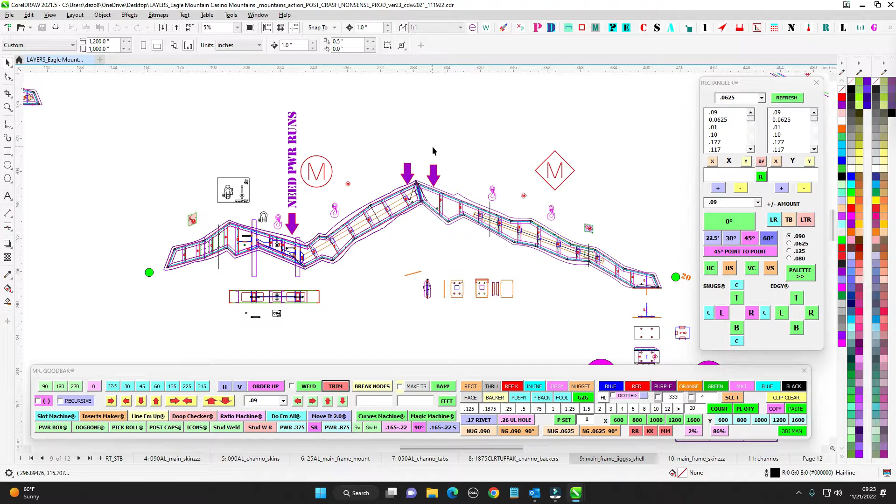So we got a lot to go over here. Pop some popcorn, but it's not that bad. It's just a lot, there's a lot of parts, and we've got some targets we have to hit to make sure this thing installs properly. So we'll just go over all that. Let's get the page turner out here.

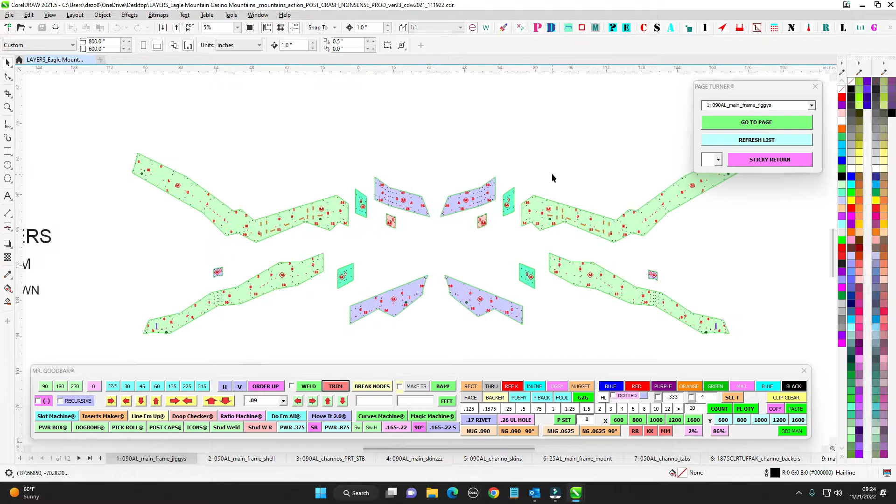All right, so let's start with the lay of the land. You got this space crab thing going on, whatever this is. So just like the eagle, you got some internal jigs, just kind of solid one pieces. And then you have a bunch of internal pieces here. You're going to rivet all this together, just like the eagle.

You got your hard candy shell. And as you remember with the tester, you guys did this kind of channel system. So this is the whole thing right here. Got port and starboard sides. These are going to be your main skins on the main cabinet. And then this is going to be your channel, I'm calling it the channel. Those are the actual channel letter parts that the LEDs are going in, I'm calling those the channels.

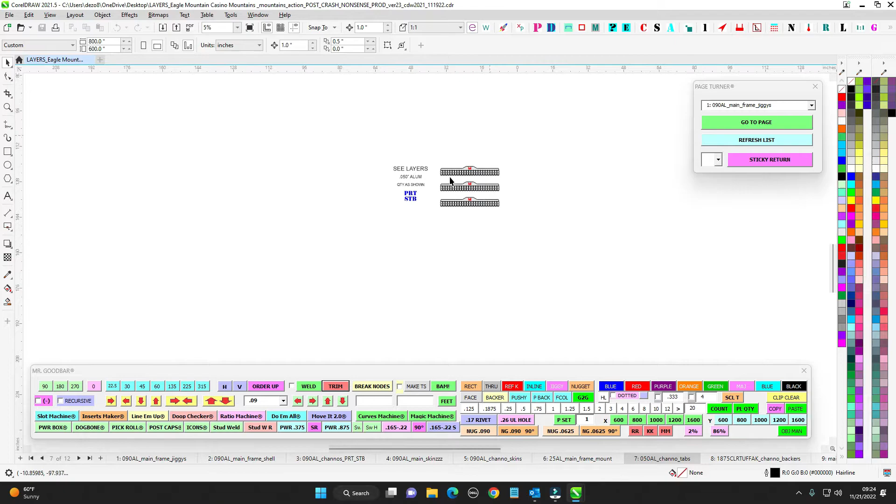And then we've got the quarter inch kind of internal thing, just like the eagle, lift point, main structure. We've got some tabs, just, since we got it dialed in, thumbs up on the little pre-mounted holes. So that should save us some time. And here's our Tuffak for that, for the

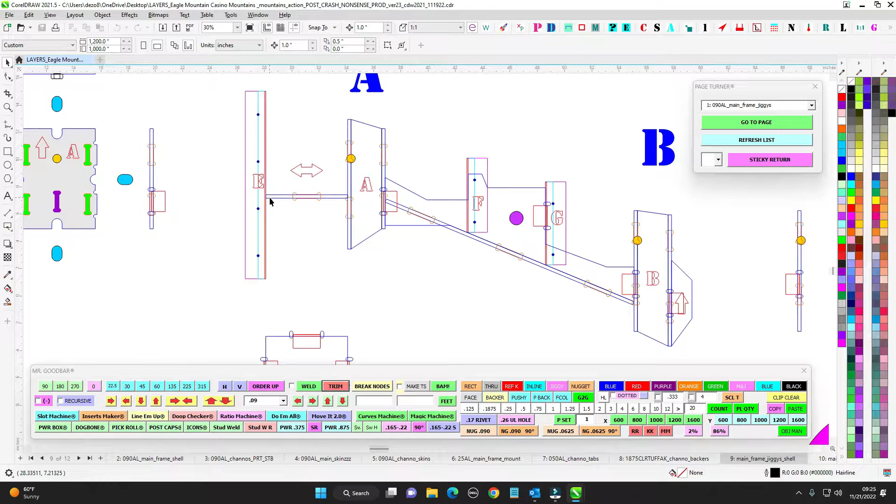LEDs there. All right, so excuse me, just like the eagle, you're going to start with that quarter inch kind of main box. This is it kind of assembled. It attaches up against E, the internal Jiggy 090 there. You'll have a dog bone, and this is kind of at a slant, and then F and G will also kind of dog bone in and slide over this whole structure. But these are going to be your boxes for your tubing right here.

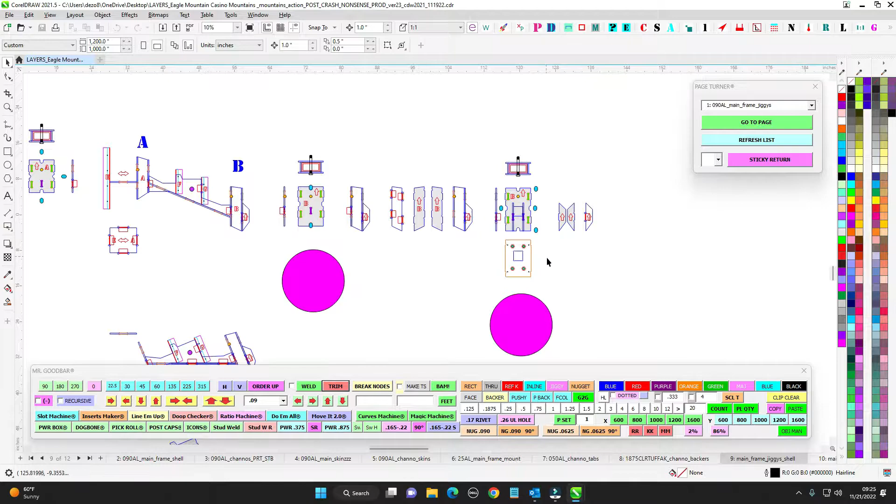Just like the eagle, you got your little internal pieces here. You got little slices here for running power through if we have to, but I'll go over that. Originally we're going to try to thread the power through this thing, but I think I came up with a solution that's going to be a lot better for everybody. So,

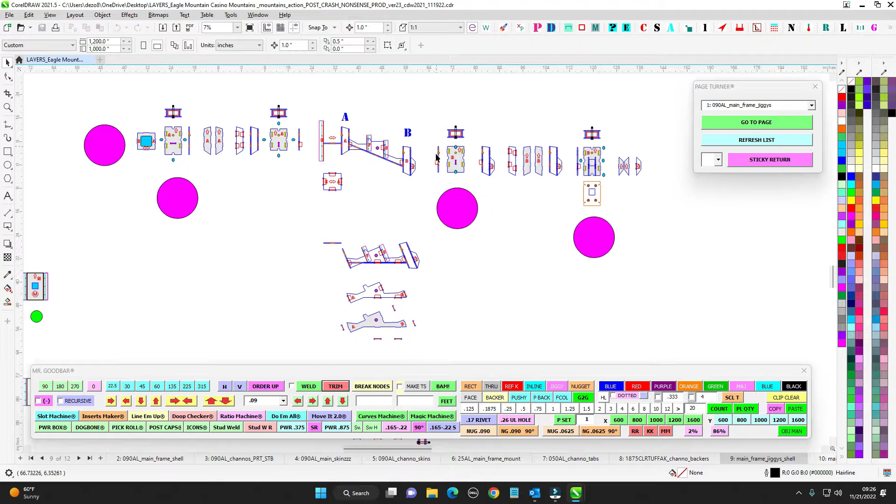So you can see here's F and G right here. Those will slide over. So anyway, get this guy kind of welded up, tacked up, good to go. I believe you can kind of fully weld this because then you're just going to put the jigs together around it. It's a little different than the eagle. I think the eagle's a little more integrated and kind of more of a pain in the butt, but this is just a more simple, get this welded up and then it'll fit in here.

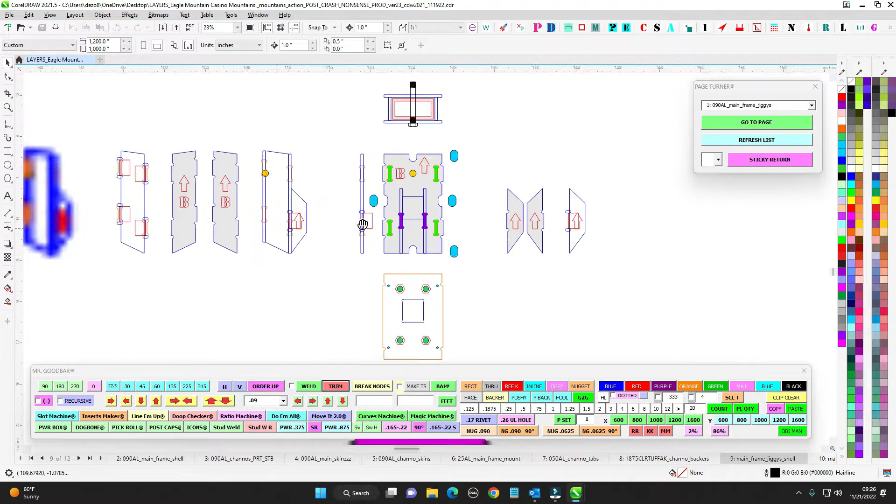Also keep in mind you have these two tabs that will be on the outside and that'll be ready to receive the 2x2 that's going to slide through. So you're going to have a piece of 2x2x8 that's going to slide through this part and it's going to lock in here and then you're going to burn this to this and then these guys here. So that kind of extends out. That's what these two nuggets are here for.

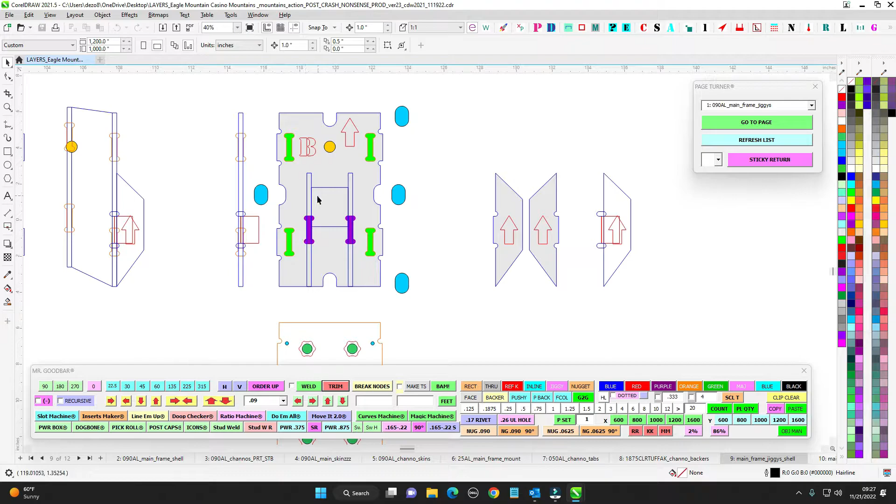So I don't know if you want, make sure you don't weld on the inside, but I don't know how that'll work if you want to just tack it so that way you can kind of bonk them and make sure that this piece, this 2x will slide in there and then you can burn it before you put the skin on. So yeah, you have to wait and see how you jump off that bridge when you get to it.

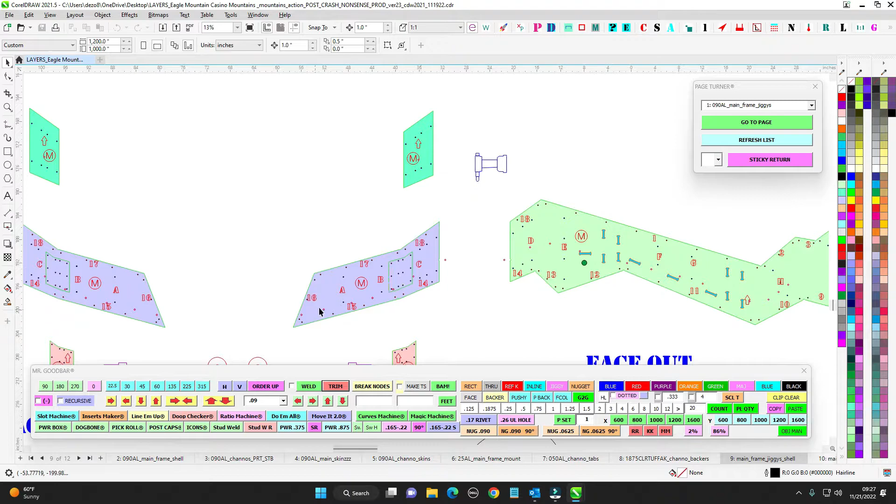Anyway, so get this welded up and then just like the eagle, get all these pieces ready and then you're going to put the quarter inch in here and then you're going to go ahead and just rivet everything together, just like the eagle, make it easy. Unlike the eagle, these splices for these pieces go on the inside. So put those to the inside and you'll go ahead and just rivet that together.

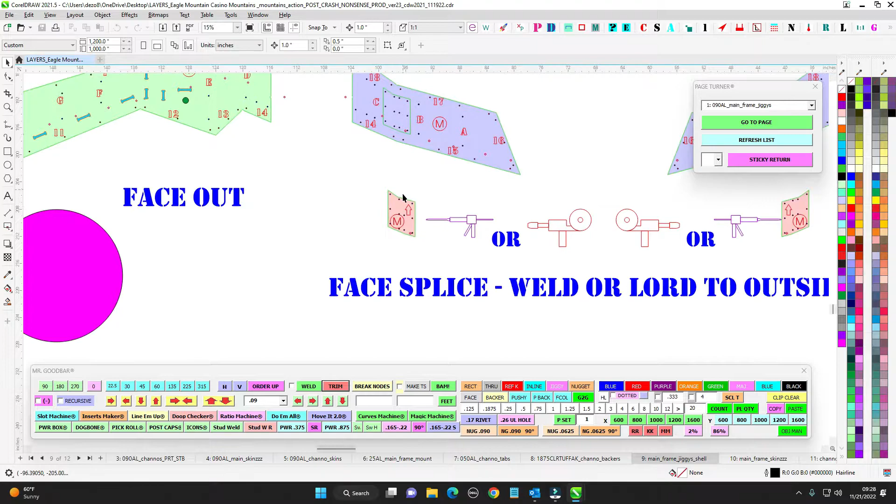And then like the eagle, the main skins are in multiple pieces here. So wherever these splices are going to land, here and here and there, on the Jiggy, you're going to have these little face pieces that go to the outside. So you can either lords those on, or I'd probably tack them on the outside and then clean them up.

And that way, when we go to put the main faces on there, we'll have a little stabilization point there. So, okay, that gets us to like this guy here and all that's ready to go.

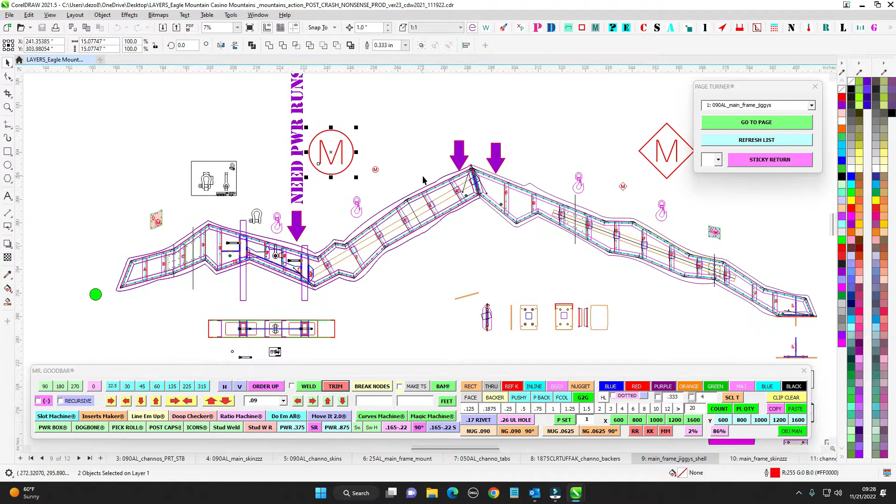Now, when it comes time to put these two sections together, you have some internal 1/4 inch plates. Now again, I apologize for jumping around. So I dedicated this one, the one that has the mounting in it.

We're going to do that as the round M. So everything's going to have a reference kiss mark that's going to be the round M for this side. And then I've got sort of the diamond M for this side, so you'll notice everything's going to have a diamond M on it that's supposed to be here. And you know, this one's going to have the round M.

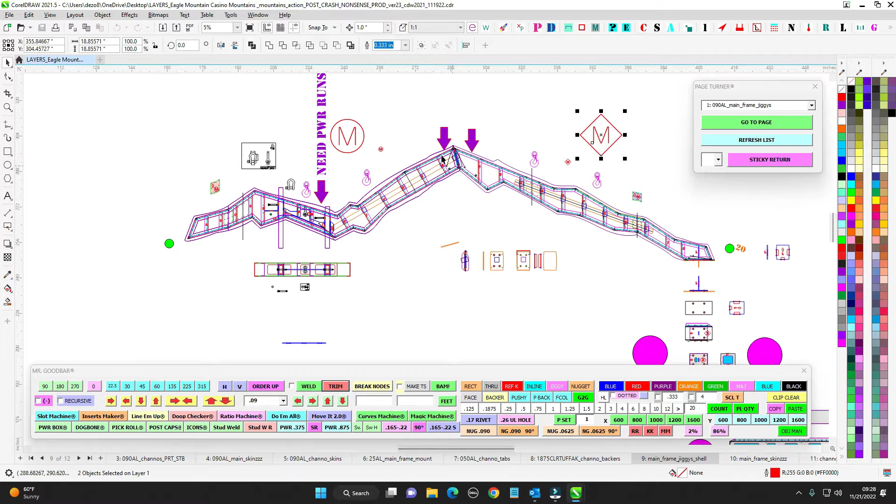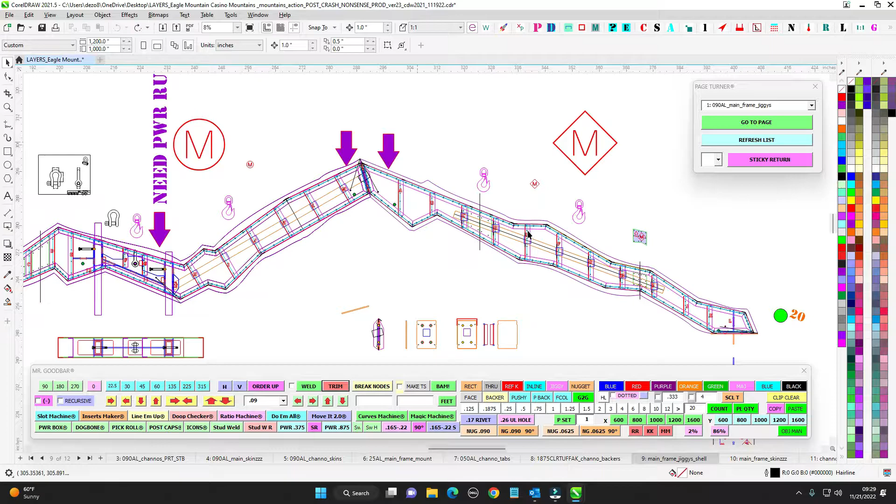So bringing these together, because this is going to be over 10 feet, and then this one's going to be over 10 feet. So of course, taking them up to the location, probably be better to just transport these separately. Whether they lift them or not, I'm not really planning on having them lifted as one, but you're going to have a bolt-together section here. It could be strong enough, but you'd have to really scratch your head on that.

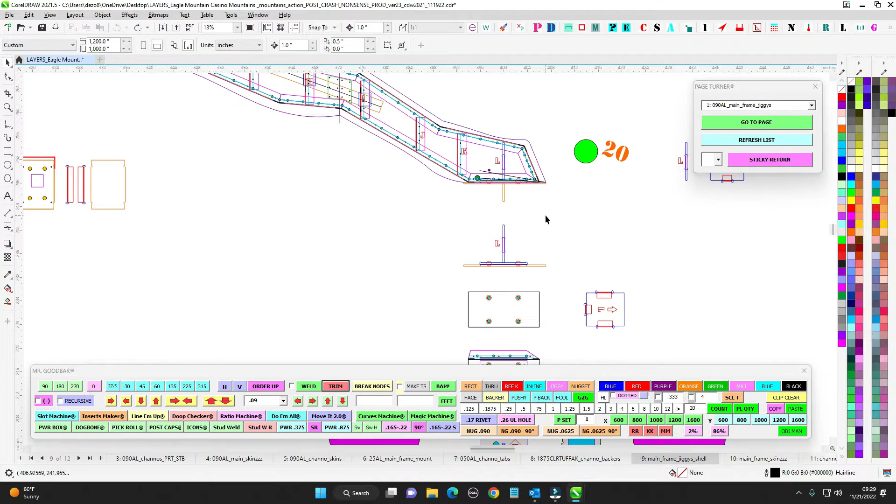But I have it kind of set where you're going to lift this and then attach this. But where these attach, you're going to have a 1/4 inch plate, and here is going to be the most important one because that's going to attach to the main box. So we don't want to miss these plates.

You'll notice that these plates here have your number 8 with your diamond M. This has 1/2 inch nuts. Go ahead and weld those up like we do, and that's going to go inside here. You see it has a notch.

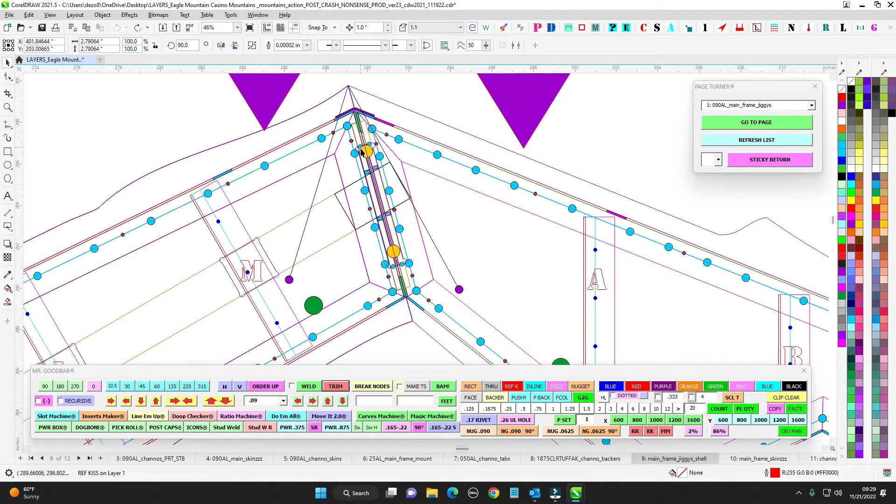And then most importantly up here, we have 2 of these plates that are going to go back to back. Now the round one here is the one that has the round M. That has our nuts here. And then on this side, there are no nuts. This is going to be 1/2 inch through, and that's on this side here.

So you can see where I have this nugget and I have this nugget. This is going to be access in. So for install, they'll have direct shot with like ratchets or whatever to get to these bolts, but that's how this is going to go on there.

So essentially this thing's going to slide down on the pipes. Hopefully the holes are there. They're going to bolt this in, maybe keep it a little loose, and then you pick and bring this piece up and set it down, and it's going to go ahead and grab what little bit of the 2x2 that sticks out. You have this little nub of 2x2.

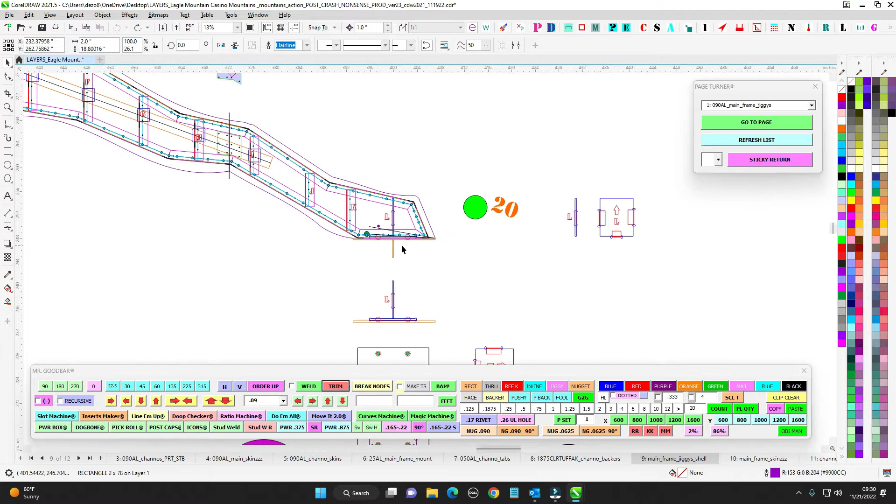The other one is just going to rest on that, and then that gives install a chance to come in, bolt this together, and then over here will be a bolting system that is yet to be determined, but at least I know where this target is and I can work out from there.

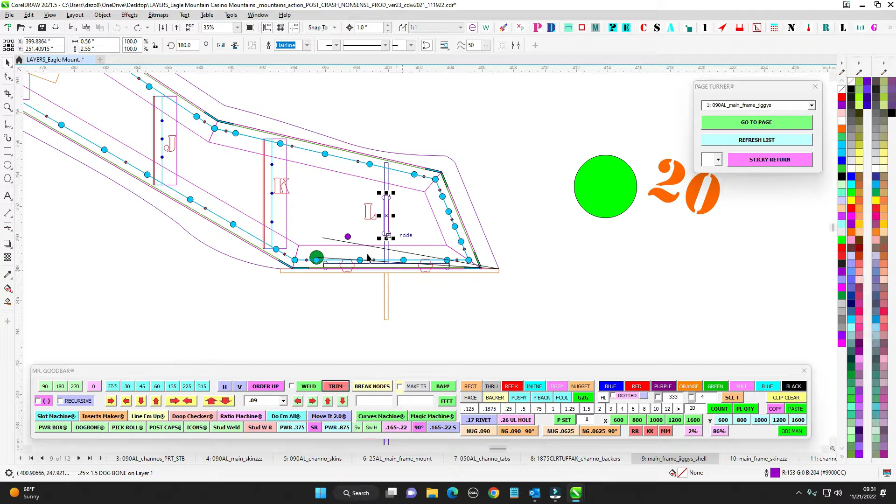So we want to make sure this plate gets in there. And then there's a little top plate here that gives like a vertical brace. So you want to dog bone this in, and then vertically, you can see where that locks in there. So you want to get that all in there nice before you put the shell on, get that burnt in and get that attached, and you can see where the Jiggys are all notched for that.

So you see where the plate goes when you bring in your round M, and then you bring it into the diamond M. You can see where that one is notched, and then where this guy goes down here, this is number 8. You can see where that lays in there, and then you'll have your vertical there.

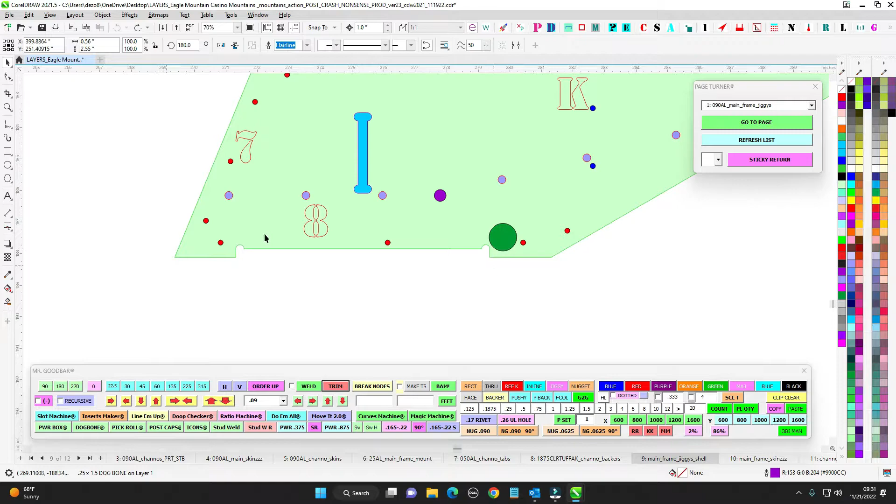So make sure that all gets in there really well. Same thing here, you're going to put this brace, this splice to the back and just rivet it, but then the front has this little guy here. That's a stabilization piece, so I'd probably just tack it like you did the Eagle, and then just go ahead and clean it up.

So anyway, that'll get you to that far where you have the Jiggys all in, everything's riveted. You get these 1/4 inch pieces all bolted in or welded in nice and get ready because that's going to be structural. You've got your cut list, so it's a 30-degree cut to make that little stick up there.

So you got that guy there, and this one here is just going to slide through. It's going to start at vertical C. See, I have everything labeled, so it's easy for you guys. So it starts at vertical C, a couple inches there is fine, and then just make sure you have some sticking out of I, so you can see where that's going to be there for lift.

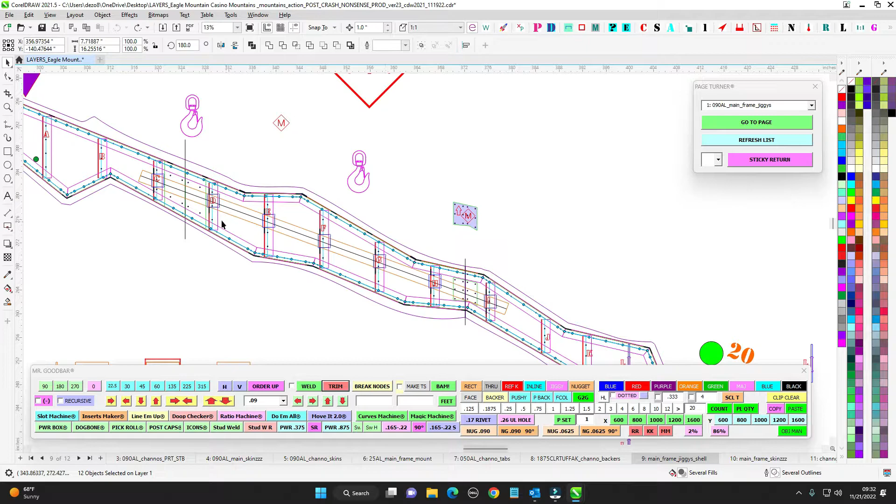I have an opening, you can see where the nuggets are there. This is an opening here, so they can do a cinch, and then you have an opening here, you can do a cinch strap. And you probably have to use uneven straps there.

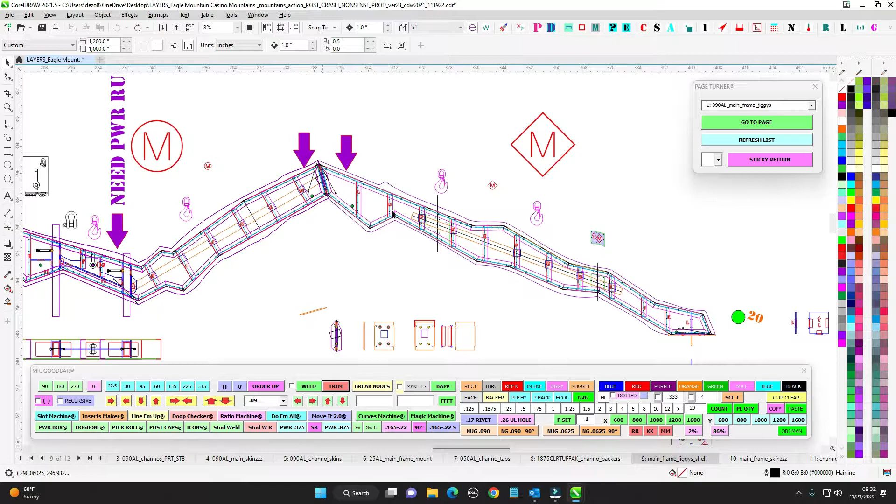But so theoretically, like I said, this will go into place. The holes should be there. They can bolt it, just let it sit, and then bring this in and kind of push it around, and make sure that this goes to that mounting plate, which is yet to be determined, but that's coming up. And then that will allow for install.

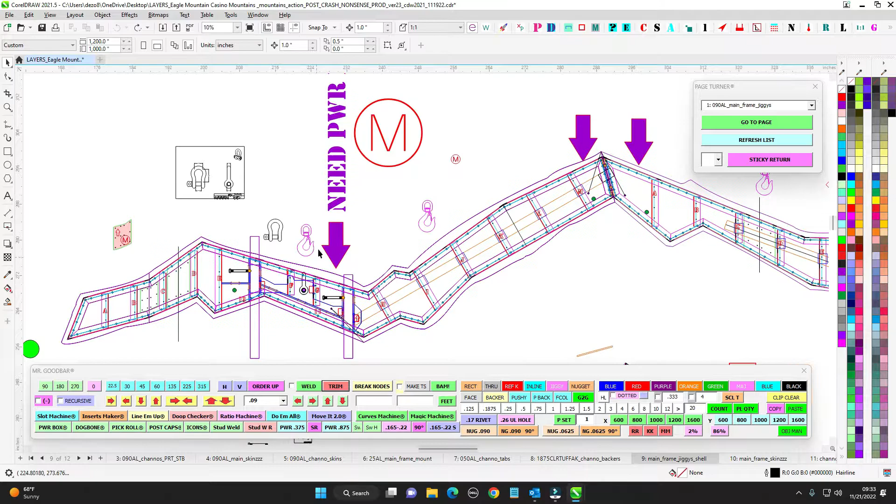Once we get this thing built, though, we can go ahead and bolt it together and see how it behaves. Maybe with a big enough strap, because I have this clevis here, maybe if it goes up high enough, we can get enough to where we can maybe lift the whole thing at once. So we'll have to determine that. But it's going to be heavy and unwieldy, so it's kind of up to install.

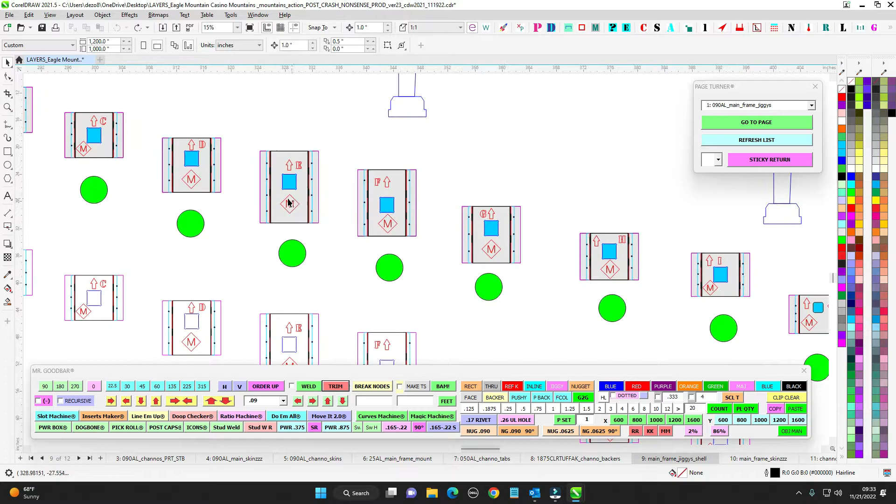So anyway, so you get your jigs, get everything riveted together. Again, just look for the diamonds, and I have everything, letters and everything, corresponding to everything here. All these scribe marks go out so you can see what's going on. Just like the eagle, you're just going to follow everything.

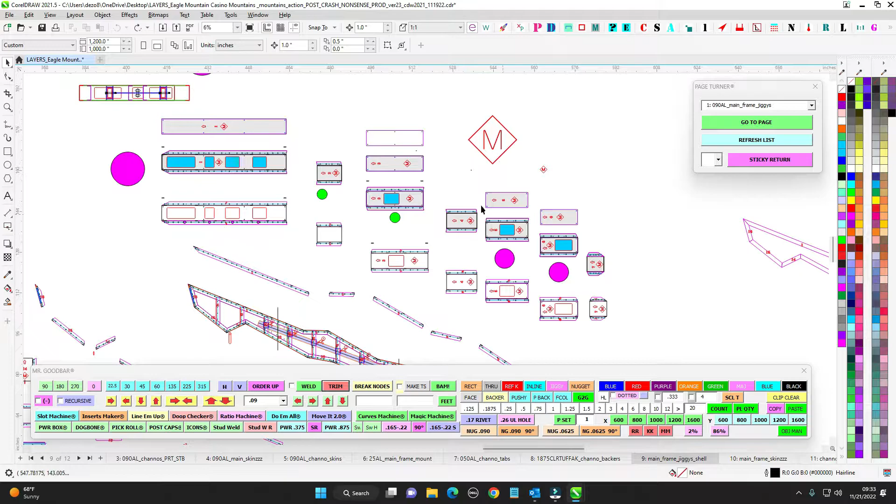And then once you're done with that and everything's good, then it's hard candy shell time. So you go ahead and follow your way around, 1, 2, 3, 4, just like that, all the way around, weld it up just like the eagle, clean it up, and then you should be ready.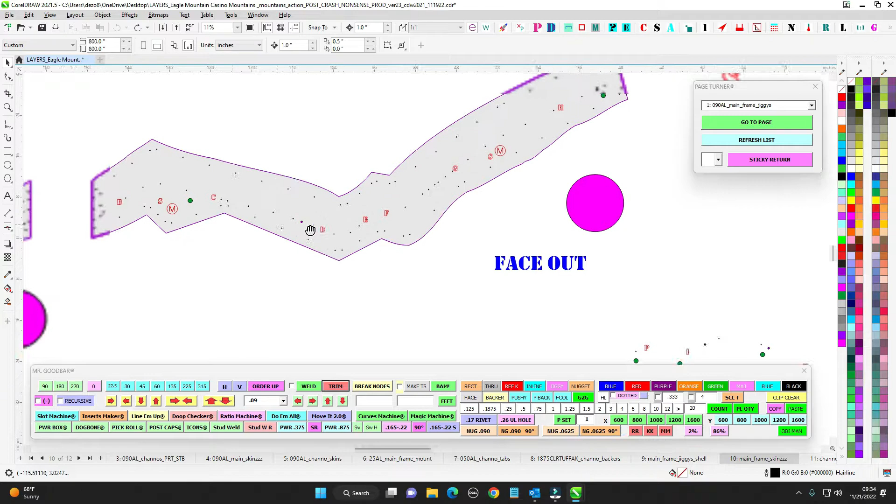So at that time we're ready for skins. So then you're just gonna lords on your main skins here. And I have the face out, so I have scribes out. All this will be hidden, so don't worry about it.

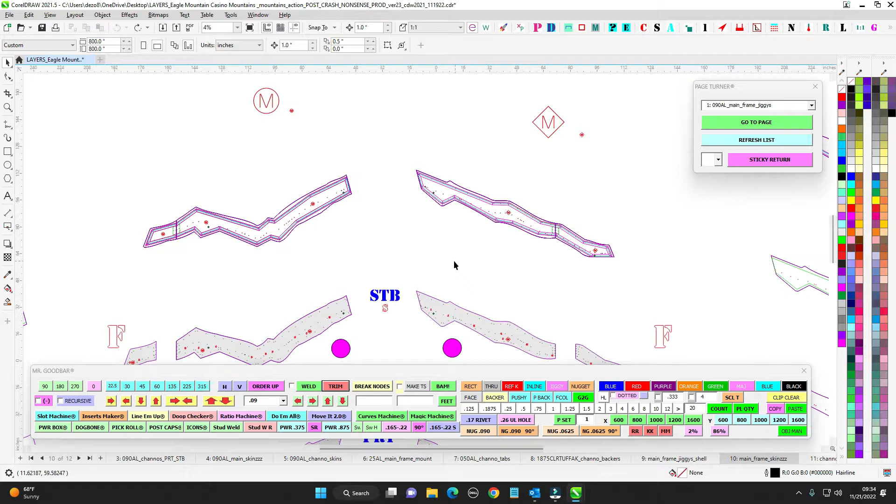But that way you'll be ready for when you do your channel returns. All this will be labeled for you. So you'll have your splice piece on the other one I talked about. So you just lords this on there, get it all nice, lords this one on, and then that way that'll be the main structure basically. And I think that'll be about done as far as that's concerned.

So once you have that all done, then we transition over to doing the channels. This is more of the sample that you did, right? If you remember, we did this part here.

So again, 4.5 or 4 1/4 return, nothing changes there. Actually, you know what, I think I have 4.5. Better change that up for you guys. Yeah, I'm gonna do that right now. Let's see, there you go. Error correction on the fly. So yeah, it's 4 1/4 depth.

Just like you did though, I have it all laid out here. You got 22 strips, 11 per side. So let's just go over, I think that might be the first thing you do because you want to get all the welding over with. I mean, obviously you're going to bend all these pieces up.

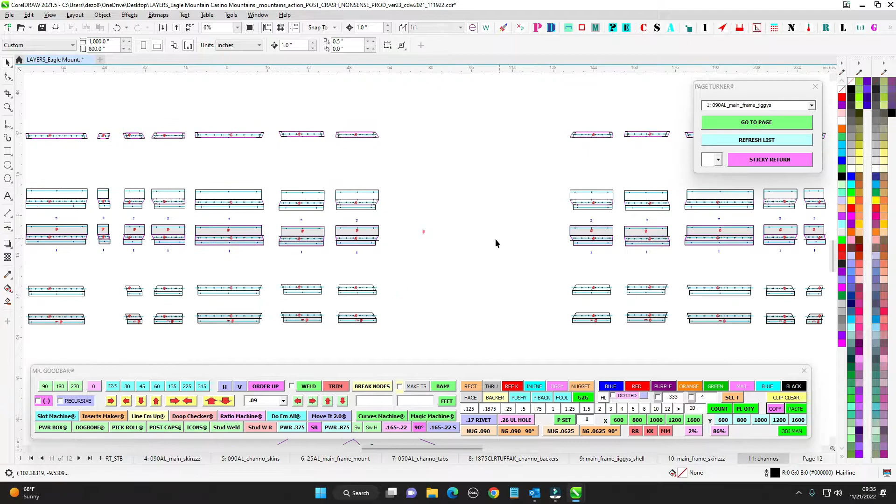Woohoo! Look at that. Somebody's standing at the brake for a while. You're going to have to Rochambeau for that and see who gets paper, rock, scissors there. Short end of the stick there.

So for the 050, it's going to start up here, and it's going to wrap around, and you're going to weld it just like you did reverse channel. You're going to start up here, and then bring it around and just follow the bottom. You did an excellent job on the sample. Looked great, so keep that going.

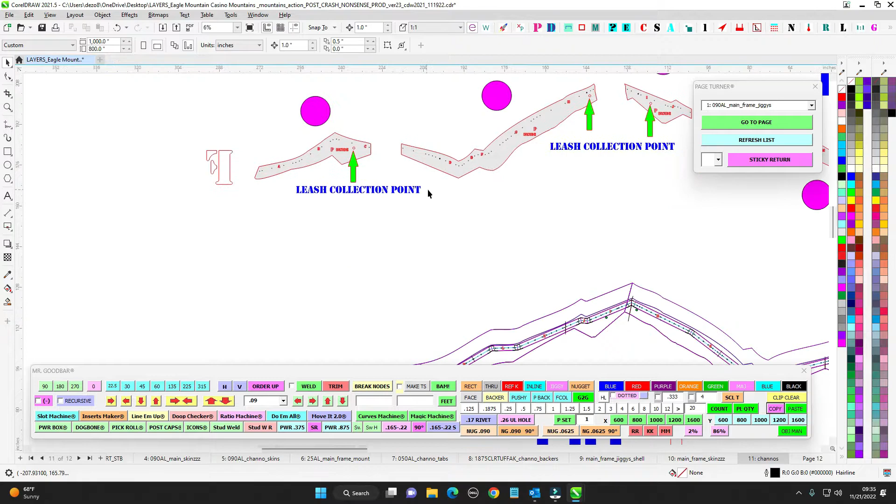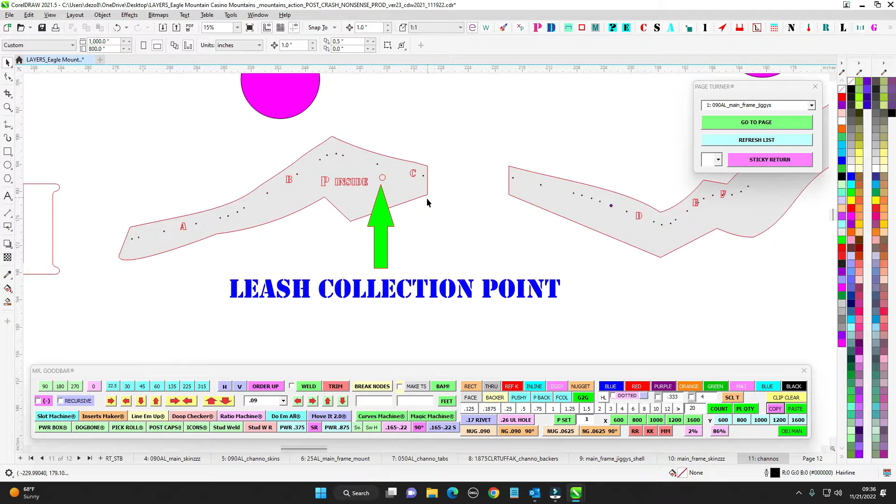So this piece here is going to be the splice for the face. I don't know how you want to do this, but the idea is that this is going to be put on there, so you kind of need to do the return first. But this needs to be spliced, so I don't know if you just want to do it in sections and then somehow stabilize that return with a little piece or something, because you can't really do the return if this is loose.

The idea is that this face is going to be stabilized by this piece, but you can't put that piece on because obviously you can't weld the return when this is in the way. So you might end up doing the returns just in sections.

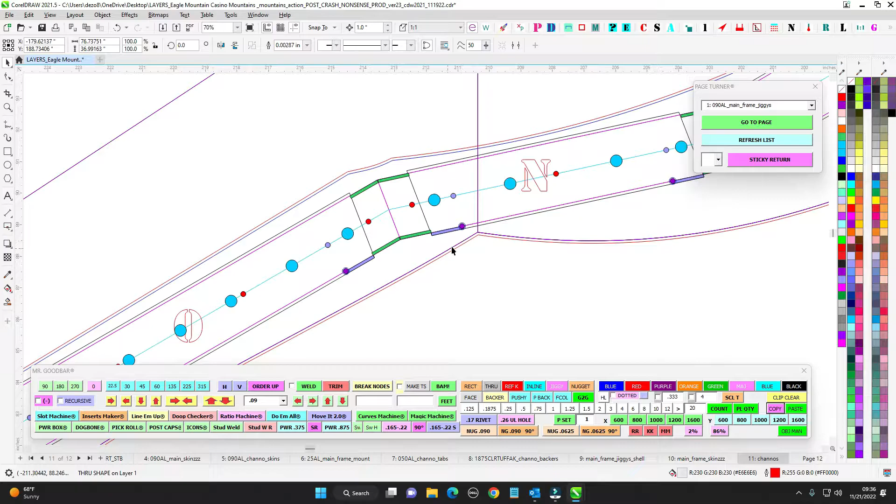And then when it comes time to put this piece on, you're going to weld this piece to it. And then you might have to weld here or something to help stabilize that, or slide a piece of bent metal on the inside with some lords or something to stabilize that return.

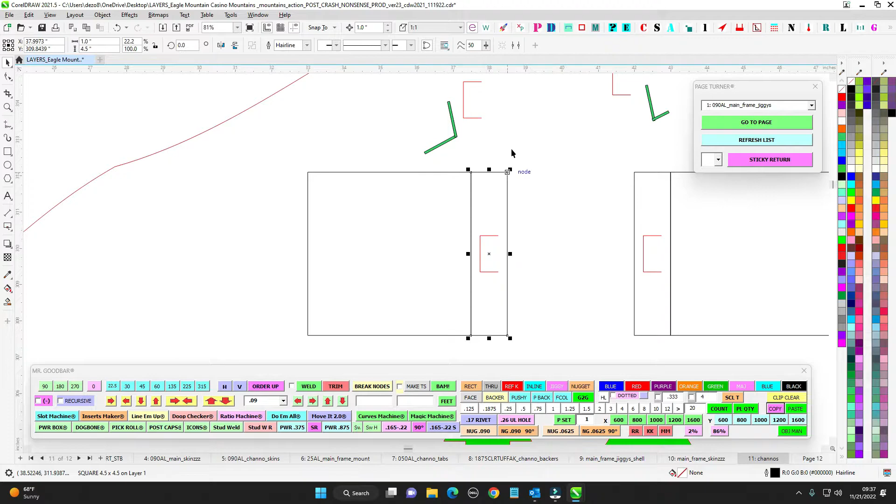But like I said, you're going to go ahead and do the 050 return all the way along the bottom, all the way here. Now when you get up here to the top, I went ahead and made a 1-inch flange, and if anything, we want to go ahead and make this a little bit smaller. We can probably overcook it a little bit, so it can be away from the edge.

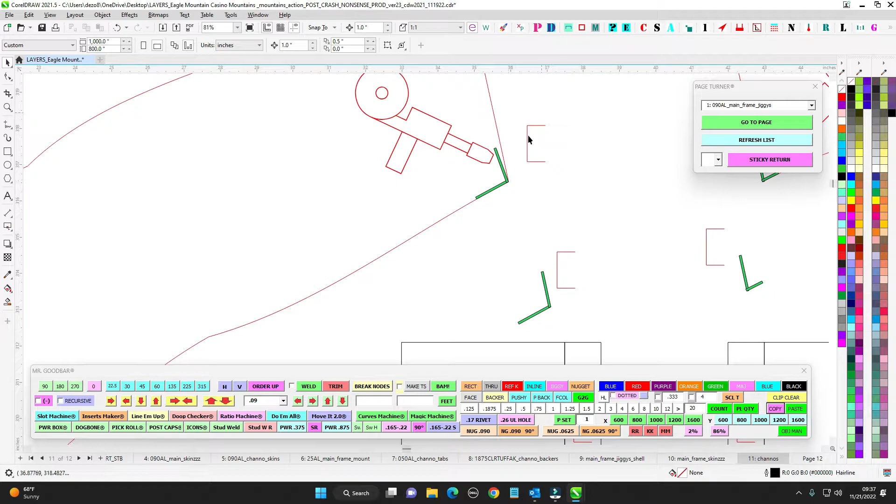So the idea is you're going to bring this up here, but we're going to have a 1/4 inch piece of return just flapping around. So I would go ahead and lay out a 1-inch bend and bend it up, and that way you can weld it to the face, and that corner will be reinforced. This will be a reinforced edge, reinforced by this piece.

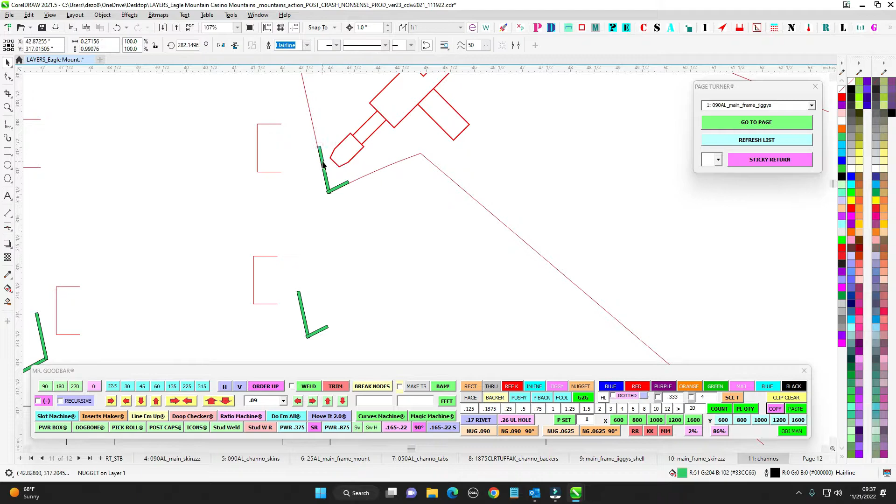And then kind of the same thing, you want to do a bend piece here. Again, it can be overcooked a little bit, it can come back like this a little bit. But we want to burn it to the face and then bring it around, so this will be a nice bent corner instead of a flappy cut piece.

And then you're going to bring this around, ring this around just like the other one, follow it all the way. And then you're going to see a reference kiss right here. If Jose's on it or if Mike's on it, you're going to see an inside reference kiss. You're going to stop here because you can see where the face kind of comes down.

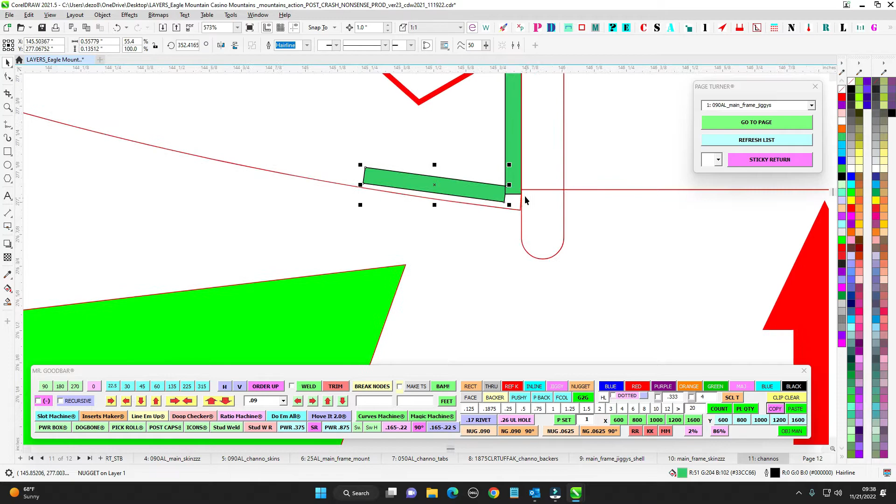And again, do a 1-inch bend up and go ahead and secure that. And then this is where the mounting plate goes, so we have no return here, but then you're going to want to dummy up the end because obviously you can see the end. So the end is just going to be a little piece of 050, and then you're going to bend it and have again a secure corner.

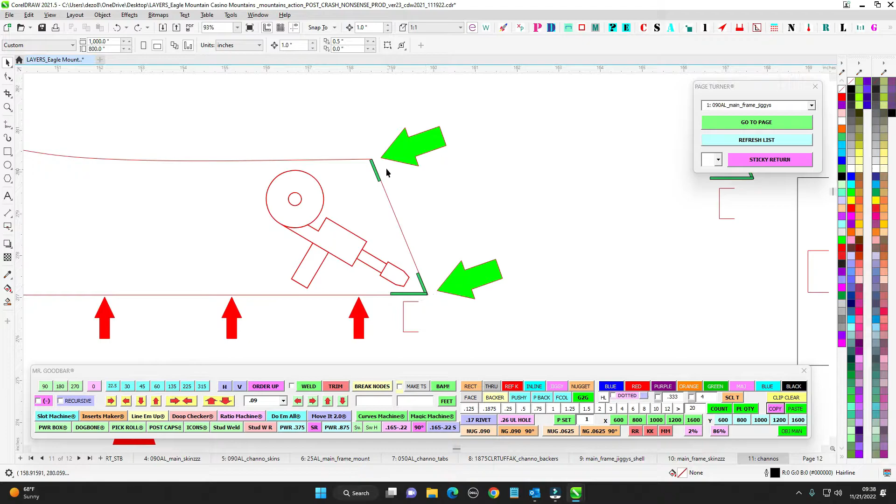Now there's no bend here because we don't want shadows or light coming out of the top, so we can't have a little flange there. But for this flange here, we want to make sure, otherwise we're going to have just a straight piece of 050 bending right here, flapping around. So we want to bring this around and nail it down.

But again, that shouldn't be in the way of the mounting plate, because the mounting plate I believe is going to be something like right about here.

Anyway, so that's kind of how to do the returns. Again, I don't know how that'll work with doing this, but then also having to weld this piece on there, so you'll have to kind of jump off that bridge when we get to it.

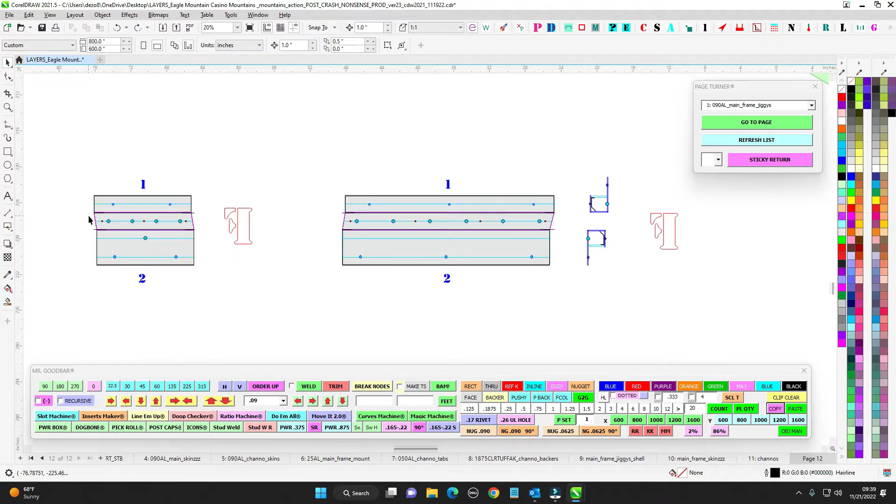So once you get the returns on there and get all these guys bent up, just like when you did the sample, you're going to have a little internal jiggy piece that's going to hold together your channel pieces, and that'll allow you to tack that together, and then you can weld that to the inside of the face return there.

So I have that in sections here. If you look over here, I have basically from A all the way to G, and then I have G all the way to H. By putting those together, it'll give you the whole section. Basically, this is the round M section.

So you'll be able to attach, I have them mirrored here, so you'll start at A here, and then you'll put those all on, cleco it all together until you get up to H, and then you can go ahead and tack all of this together as one unit. Then you can take this whole unit and cleco it and weld it to the faces here, right there.

And then that way you'll have that whole section ready to go, and then do the same for the other side. Take your jigs, cleco everything together. You can see M is long enough to hold this together as one piece, and use M to hold all this together. Once you have this all as one piece, then you can bring it up here and attach it all there and weld it up, and that way that'll all be one piece.

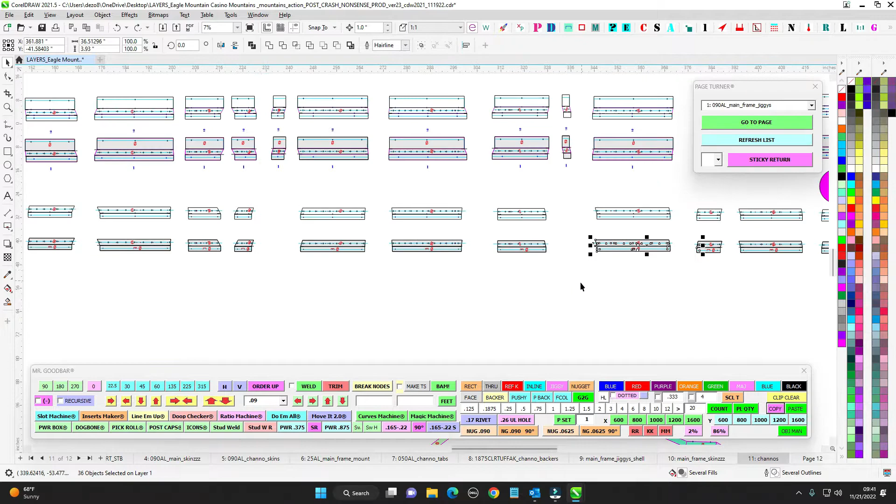At this point you're going to go ahead and take the other pieces. If you remember these pieces here, just the single bend pieces, these angle pieces, these ones get attached to the main skin to receive all this. Now remember, this is going to be Lorded at this point, the faces.

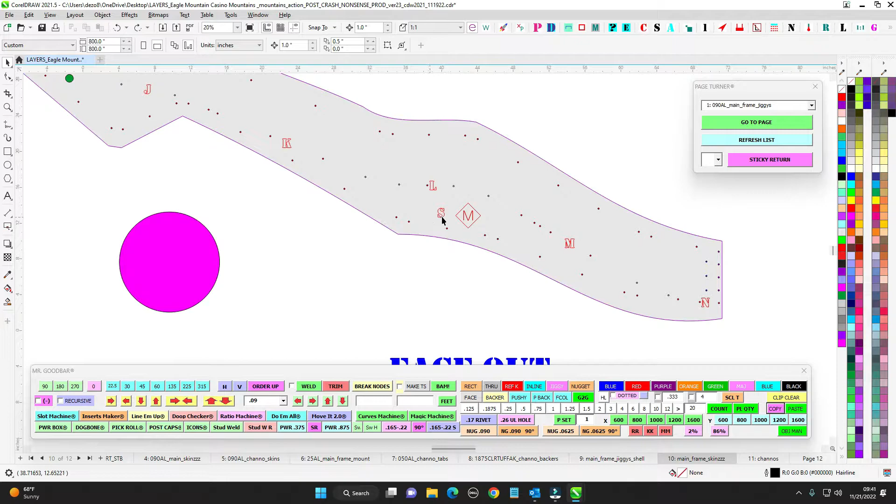So I don't think you're going to want to weld. I know on the sample, you welded that piece to this skin, but remember, this is going to be Lorded. So I would want to probably Lord this, and because you're not going to see this, you could probably get away with either throwing in some safety rivets here and there. They don't even need to be countersunk, or you could shoot some self-tappers into each of these, one or two, just to give a little safety for the Lord. But obviously the Lord's not going anywhere.

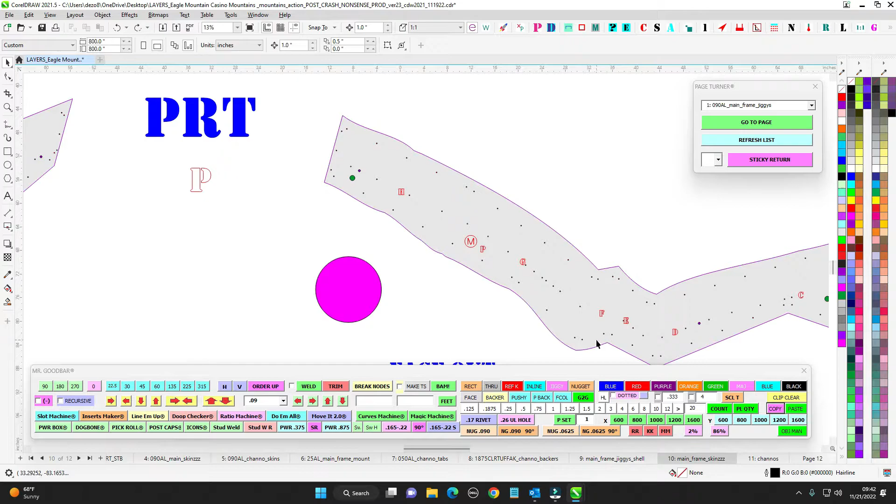And for that matter, you can shoot some safety rivets into a lot of this stuff if you want. But if you shoot some screws through this channel here, a couple through here, that will be going through this face, and then you're actually probably grabbing the shell, although I did clearance these holes, but it'll basically be kind of safetying off. Feel free to throw some countersunk rivets on any of this on the main frame, every so often if you want.

Rewinding a little bit, just like the Indio letters, you're going to have that issue of having all this void. So you're going to lords around the frame, and that's great, but all of this is going to be void. So we talked about that.

You can either burn a bunch of lords, or the DTM stuff we brought in is up against its manufacture date. But maybe do a sample, take a couple pieces of 09, squish them together, and let them sit for a minute and see what's up. Let them sit a day. But otherwise, or do we just use silicone in there?

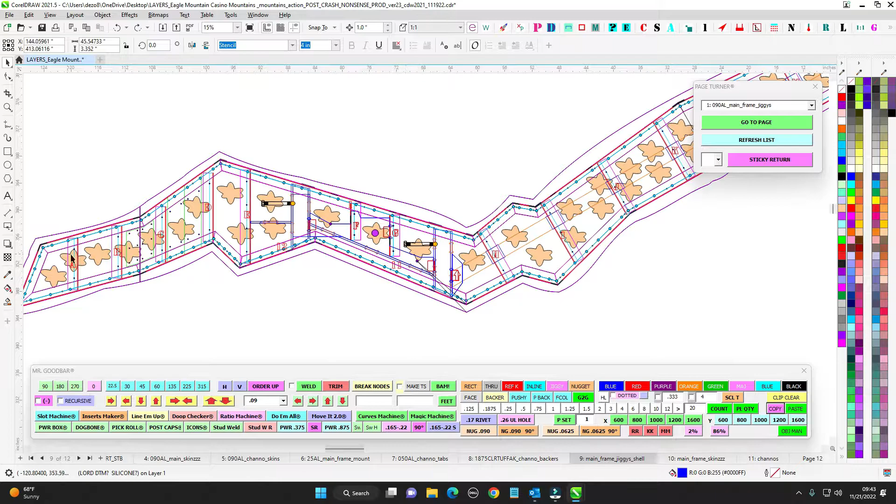We talked about that already, but you're going to have to fill up all this void. What this means though, is you're going to have all this lords together, and then the mainframe skin, you're not going to want to weld against this now. Remember, you want to weld first, then lords, never weld on top of lords.

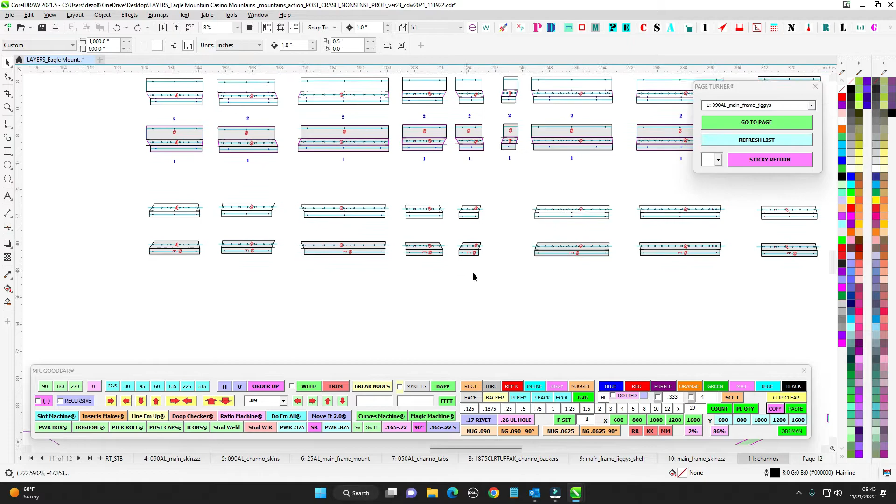So all of these channels here, I would suggest lordsing them on, and then you can shoot some safety rivets or just some safety screws. But all this channel stuff here, it all goes to the main skins, but because you're welding these returns on first, this is already going to be heated and welded, so you might as well just weld through here. And again, I gave you plenty of 3/8 to weld. You can weld on the outside as well to tack it to that face.

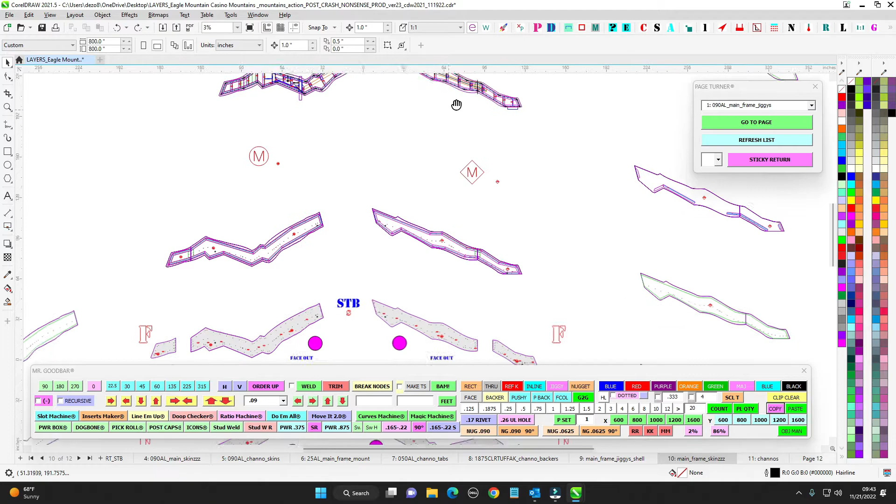But I'm seeing this whole system just welded, and I'm seeing the other system is going to be lords because it's going to be cold lords. So anyway, once you have these parts all done and put together, then you can weld these to the main skins, and that'll be all one unit, and then we're happy. So I think that brings us up to, like I said, there's a lot going on, but it's not that difficult. It's just check off the procedures, and then you're good to go.

But just these different little targets, these little things we want to make sure we have success with, just don't lose sight of that. Now when it comes time to LEDs and the polycarbs and whatnot, I had to go around and around a little bit, and I actually, last minute, 11th hour, changed how this whole thing goes together. I had it all set, and then I was like, oh, you know what, this is the way to do it.

So let's bring up, so we got the polycarbs, nothing crazy here. Just make sure you have the right one, I have starboard for S for starboard, and we have port for P. And again, unfortunately, there is a P part, but don't let that throw you.

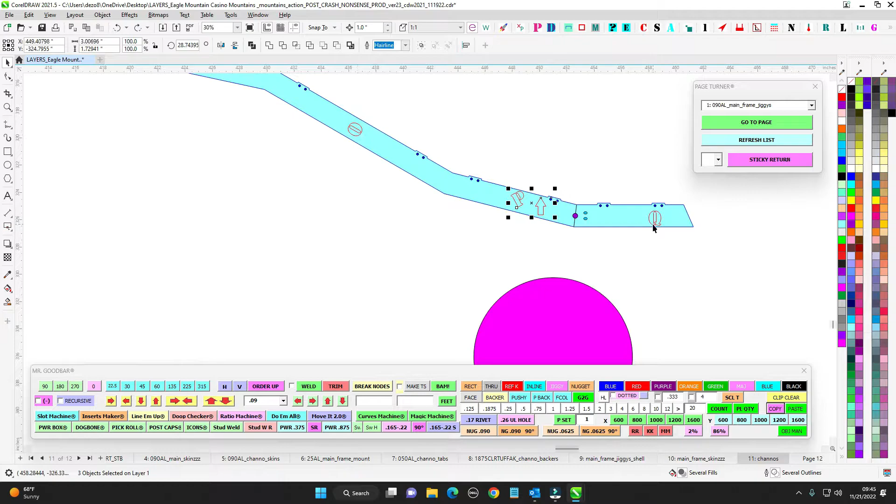You have the M, you have the O, P, and Q. Don't get confused with the port part and the starboard part with the S and the P. Anyway, go ahead and shoot on all your tabs. They go to the outside only, which is fine.

Let's talk about how the LEDs run. This will also be kind of for install. I'll probably go over this with install directly, or I'll make another install video. But if install you're watching, I know you are.

So the idea is there's two things we got to do. We got to obviously light the mountain, right? Okay, fine. But we need to get power up to the eagle, the anonymous eagle, the random eagle up here. Because this is going to be 20 feet by itself, we're going to have, I don't want any voltage drop.

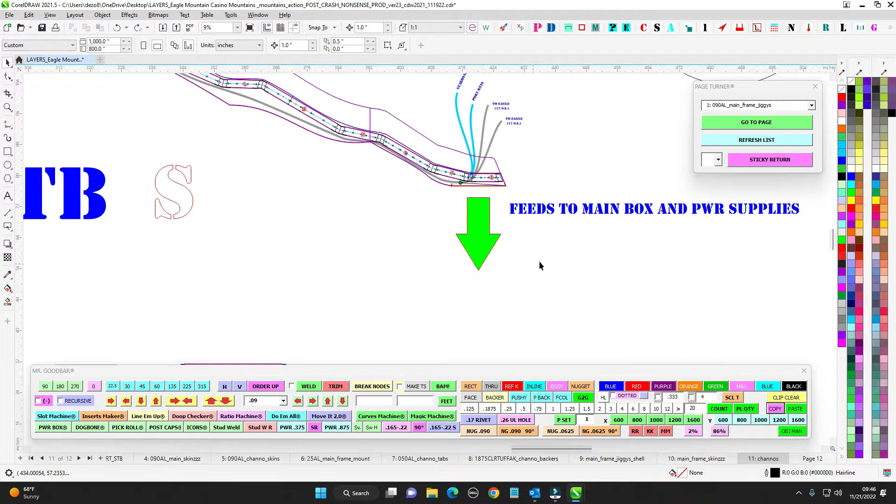So we're going to have to run the heavy 12 gauge up to the eagle. Not only that, but we're going to have a 30-foot box or whatever, and even there we're going to have a couple feet of drop depending on where the power supplies go. But the idea is we'll have all the power supplies in the main box. Again, it's to be developed, but I have at least a target to hit. I'll figure all that out. I'll blow up that bridge when I come to it.

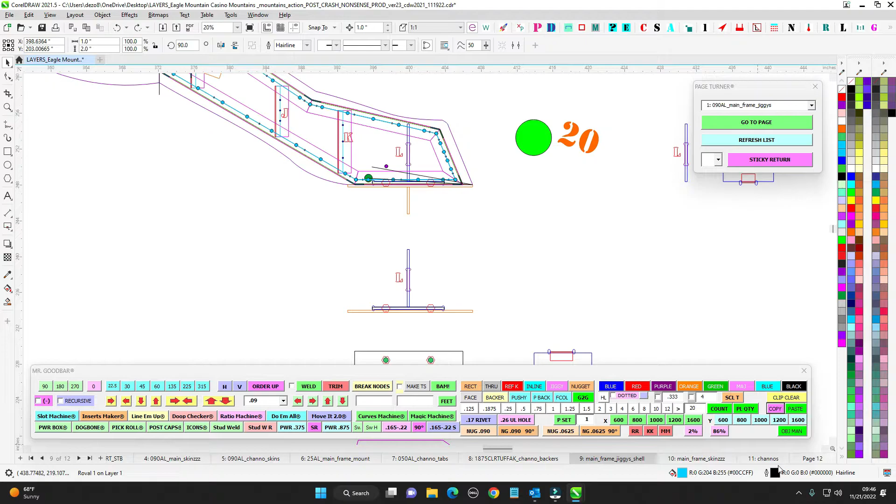Essentially this right here is going to be power through, and that's going to come through the spot here into this little collection point. So this will be kind of our collection point here, and that's where it all kind of starts. Power supplies will feed into this little spot somehow from the main box, and then there'll be a cover here, take that off.

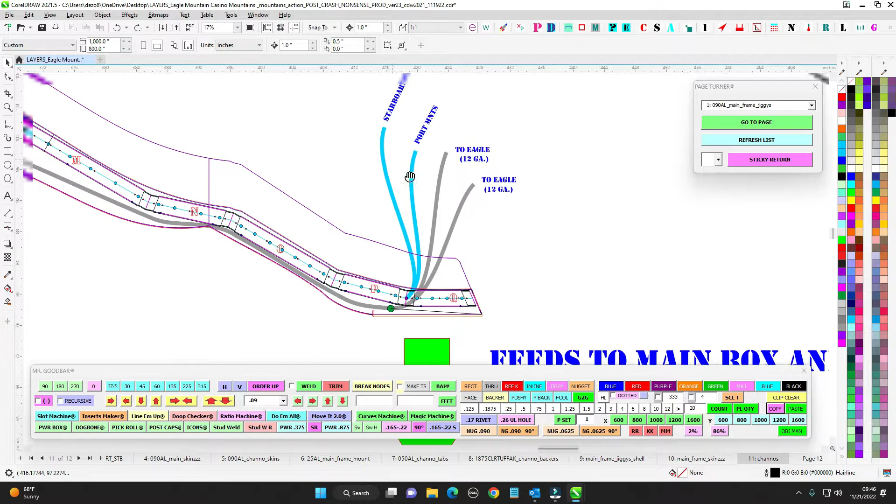So then we can wire up the starboard mountains that go up this way. That'll be the polycarbs, and I'm seeing like page wire - it's all we need, nice flimsy page wire is fine. And then the port mountains will be on the other side, that's fine, they'll have power out.

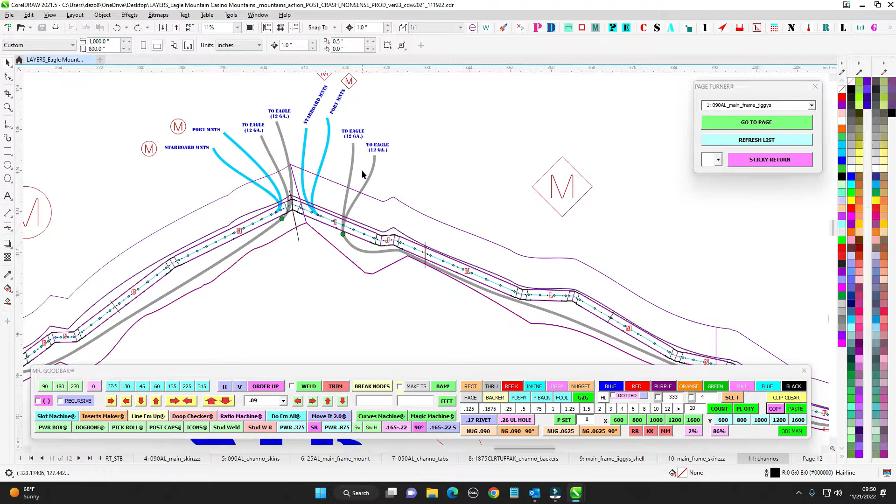So like I said, I'm not sure we're going to be bringing these together in the shop and then taking it or lifting it as one, or when this piece goes on first install. Basically they will have access to a little box here and a little box here, and they'll be able to bring the wires up and connect and everything and bring it up, and then you'll have that.

So we still need to kind of figure out how we get these wires up to the eagle, but that's again another bridge we have to blow up when we get to it. The idea is that, again, we're going to run the 12 gauge up to here and then connect, keep 12 gauge going all the way up to the eagle, so we have little voltage drop.

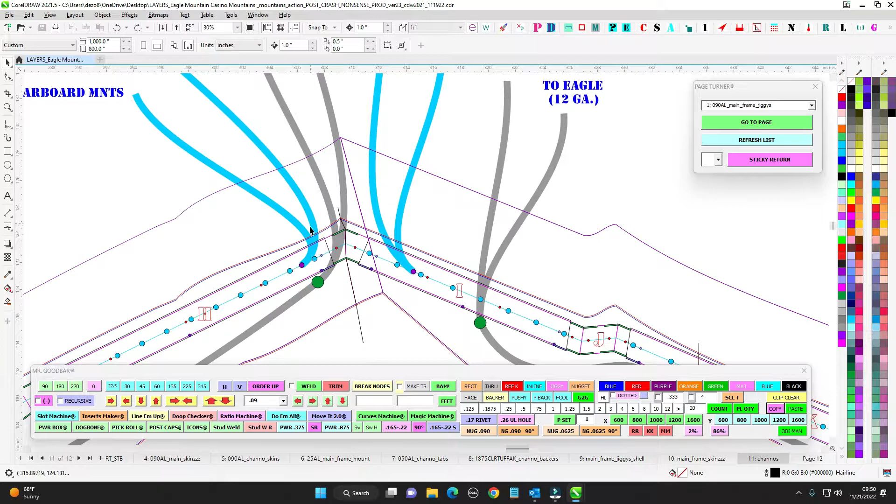And then these will just be the splice points for the mountains anyway. So the whole idea is it'll be LEDs in the polycarb all the way along. The polycarbs are broken into sections here, so you'll have power through to start and then come along here. And then we'll just have a blue page wire jumper inside the polycarb, inside the channel, inside here. So that'll be where this lives.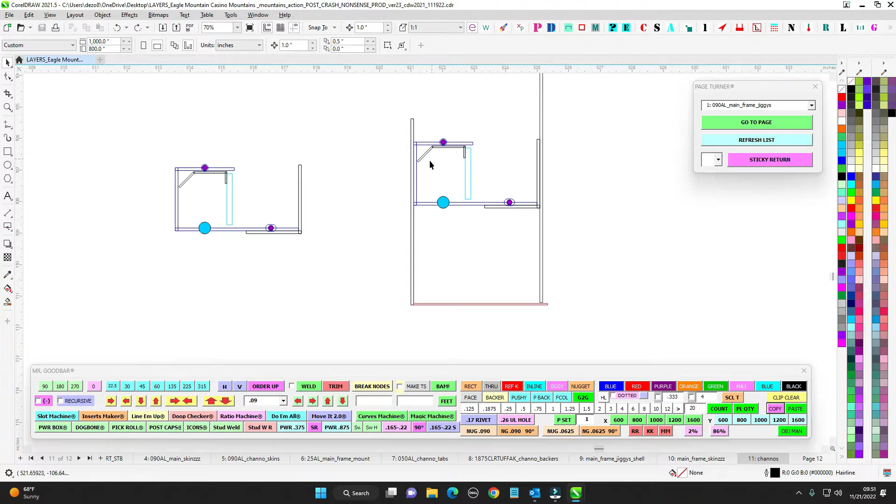And then kind of wire it up and then install it as one piece. Then you'll have this jumper here. This leash will be big enough, and that's this leash right here. So that leash goes through into the main cabinet. You want to have a couple feet on that just to make sure it's long enough to play with. So that's this part here.

Same thing here - this leash will be the long one, couple feet, and then it will continue along here with LEDs, and then we'll have a mini jumper from this LED to this LED, just a small blue, but that'll be installed all ready to go in the mountain already. So that's kind of an external splice somewhere around here.

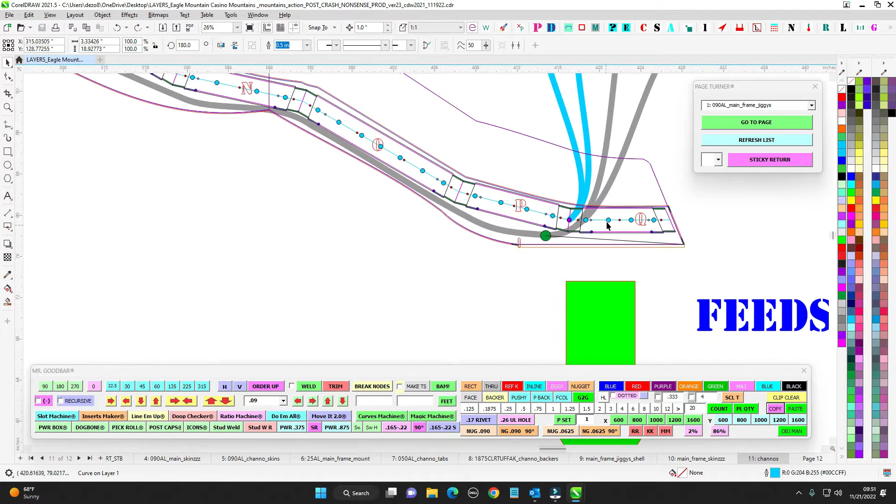So when it comes time for this 12 gauge wire, you'll see that I have big points of entry here and here and here in the framing and here. So that's basically how it's going to enter the main framing and then re-exit into the channel.

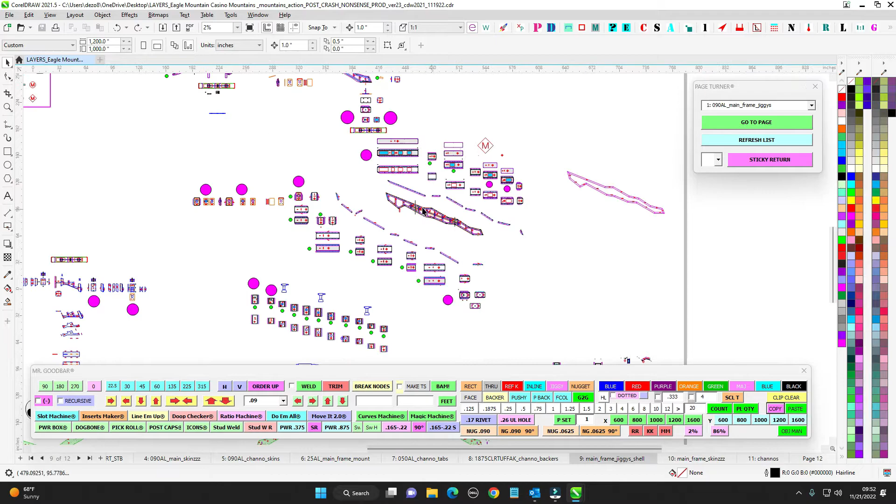So as you can see, the wire is going to actually be in the outside channel here, because I was like, how am I going to get this to feed through the main structure? This main structure is so full of crud here, trying to get 12 gauge wire through and having to make a bunch of access ports and everything.

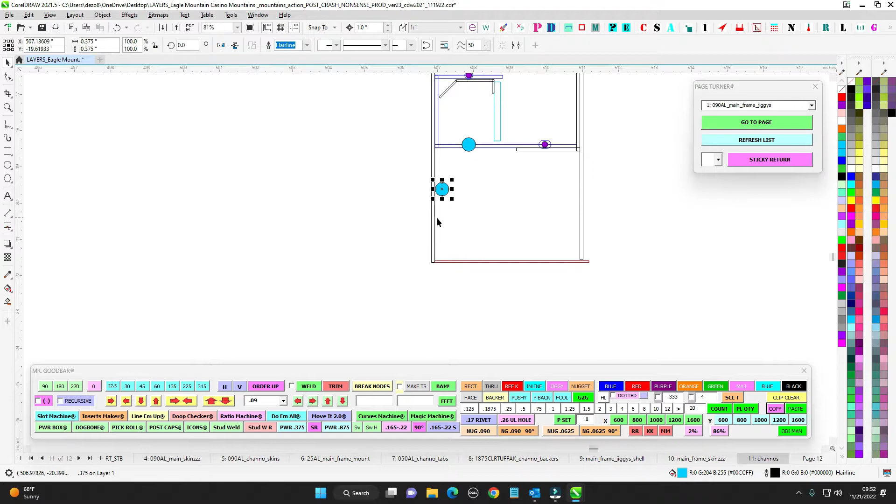So I went ahead and said, well, you know what, we have this 4¼ inch channel here. So what we can do is take that 12 gauge wire and put it inside here. You guys can either use the zip tie stickies, little pads, or you can do some 050 strips where you just chomp it and then bend it, tack it to there and bend it and it'll hold it. Either way, the wire is going to live inside the channel, this little void here inside the face channel.

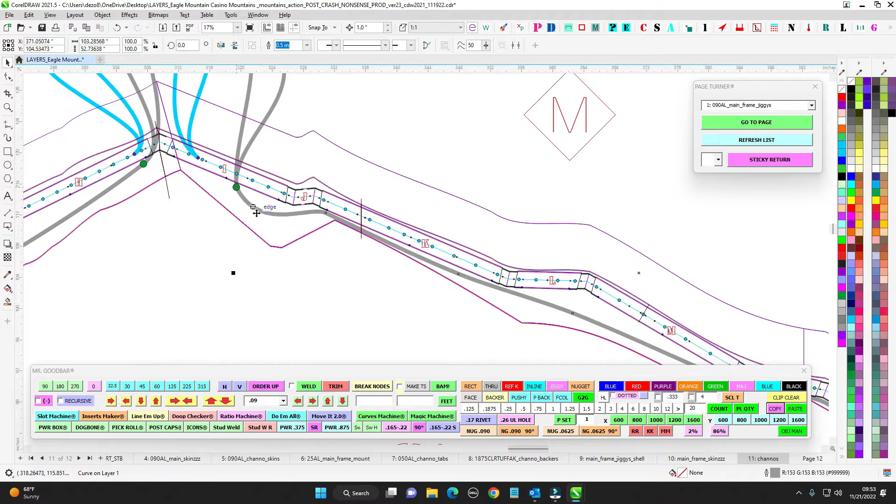Make sure you have long enough leashes to go another foot or so out. Same thing here, it's going to come into here and you'll have both of them there. Now on the 12 gauge for the Eagle, you'll have 2 circuits, but you can keep them both on the same side. You can just stack the wire on top of each other. You don't need to put one circuit on one side and one circuit on the other. You can just stack both wires next to each other, just like that.

And then you either zip tie them down with the pads, or again, you can do a little tack on a 050 clip that kind of keeps things stable. So you'll make sure you have plenty there, 12 gauge.

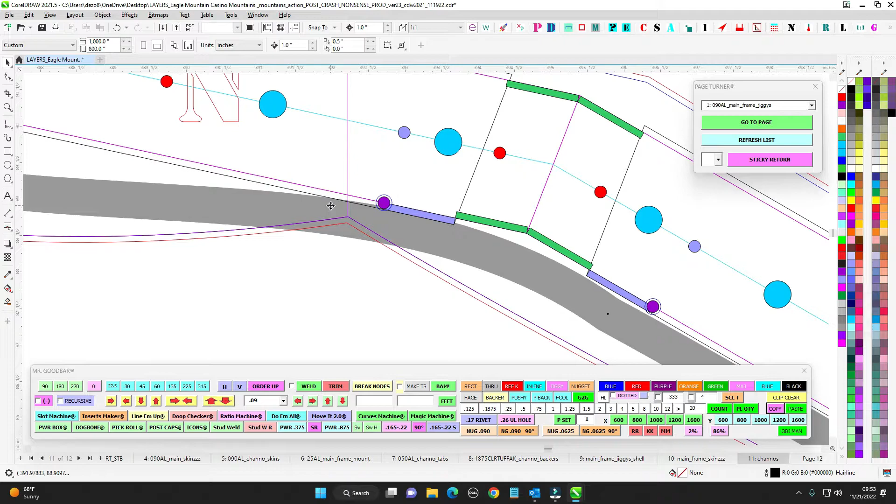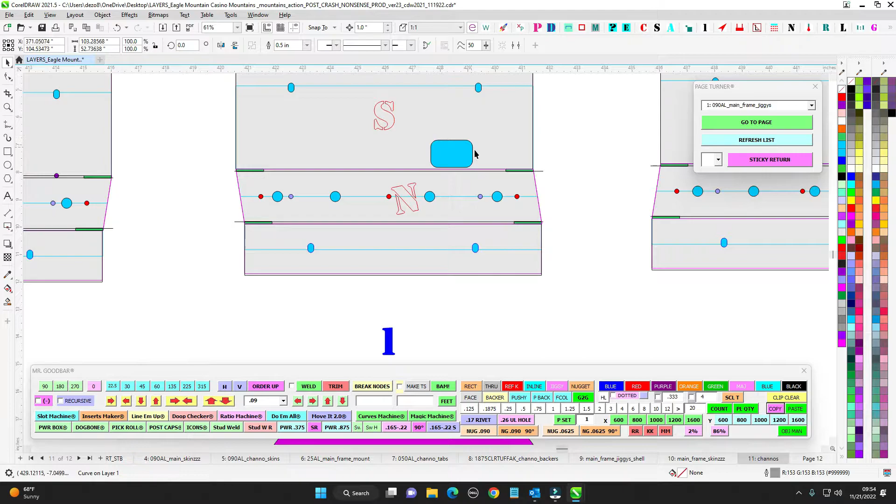Now you'll see where this is, I have this at a 1/2 inch, which is kind of close, 3/8, but it gets super pinched right here. So I did you a favor on N, I made this little hole right here. So this little hole, you don't run it through. It's just a clearance for when you bring this wire through here, the wire can hump up in there and come back down. So I made you a little clearance right there.

So, all good. I don't see any other issues. It gets a little tight there, but should be fine. Same thing here, you're just going to run that along there, both wires, make sure it's secure, and then leave enough leash out to where it'll come into the main body.

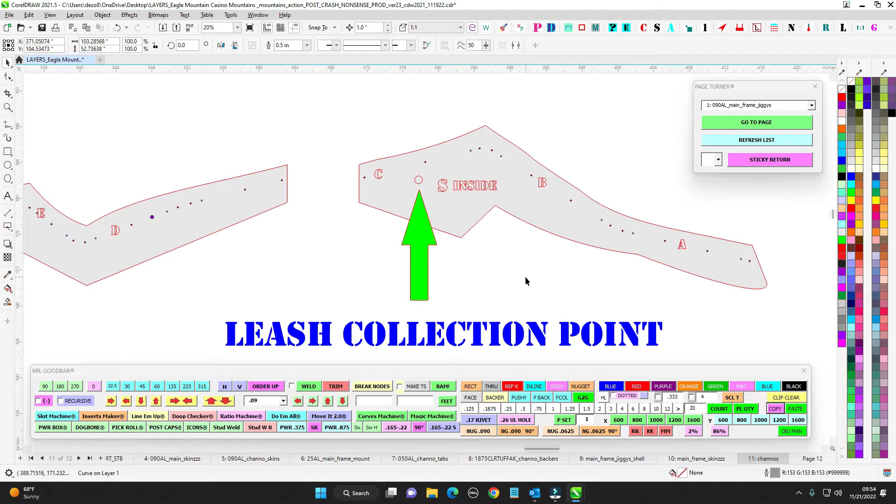So once this is all one unit, it's all done, you've got your channels on there and everything, then you can just take some 12 gauge wire, give it a couple feet here and then bring it around, and right around here, make sure you got about 2 feet or something, and make sure there's 2 of them on one, and that's all we need.

And then same thing here. Make sure right around here is where your leash ends, make sure it's stable, bring it around, sneak it through, and then right about here, give ourselves another 2 feet. So that should get us wired up for the Eagle.

But again, we need to figure out how we get from here to the Eagle, whether it's a little piece of conduit, or we try drilling into the steel, which is going to be a real pain in the butt. I don't know how to get from here.

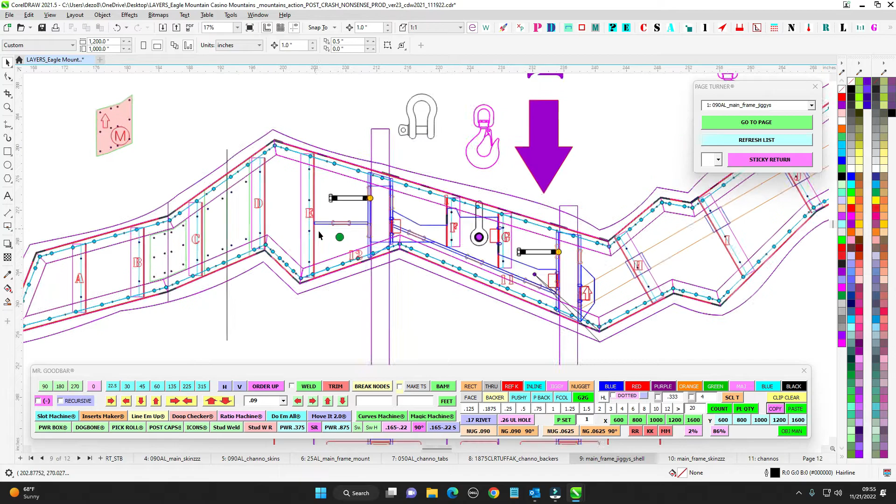So this will be the collection point, just so you know. So in this cavity here is plenty of room. So you'll have those 12 gauges. So we need to get out of this pocket.

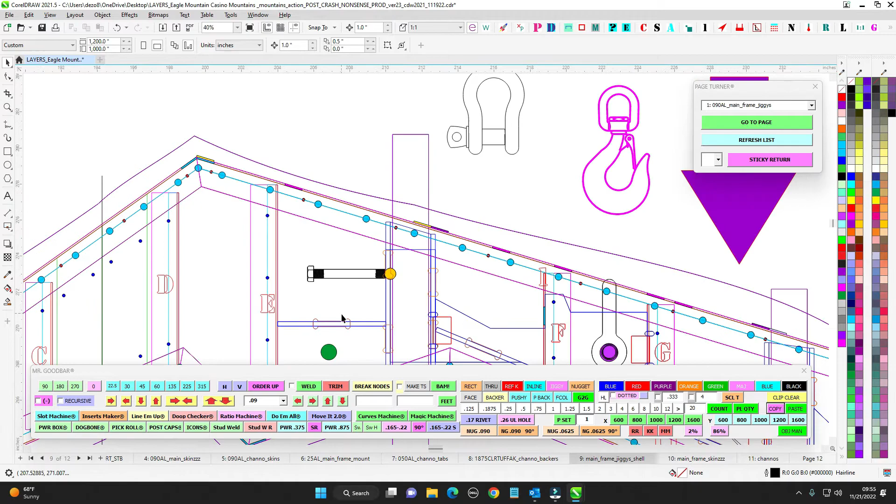Either we have to drill into the steel and then drill out of the steel inside the Eagle, which is a pain in the butt, or the Eagle is going to be right about here. So whether we can just sneak up, straight up, and drill a hole in the bottom of the Eagle and just take it up, that'd be great.

But you'll see I have a little area right here. This is all recessed for that. Oh wait, no, it's E, part E. There it is, yeah. So right here, we got a little hole right there. So that's where that wire is going to live, right in this little pocket.

So, all right, I think that's it. We got the electrical handled.

Let's see, I think that makes sense. We got that 4¼, good thing I saw that. But I'll update the PDF for that.